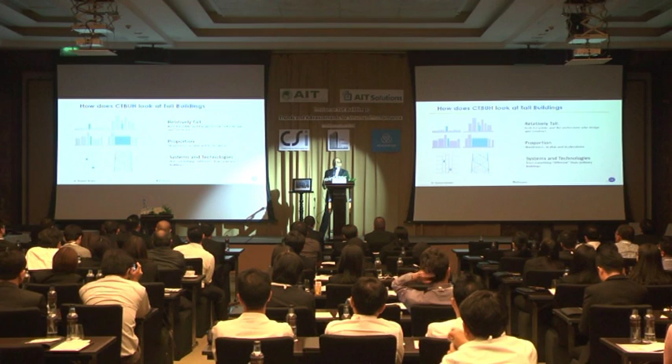Similarly, proportions: it's not only tall, it must also be a little bit slender so that we have issues with that. And then it should use technologies that are typically not used for other buildings. So that's how we will define a tall building.

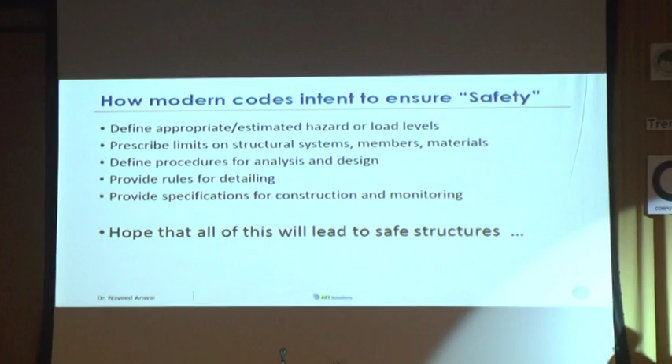How modern codes look at safety: I mentioned earlier in the morning that they just hope for the best. They give you rules and they hope that all of this will lead to a safe building and people's lives will be safe, and that's just about it. And it doesn't seem to prevent other things that we have seen in several presentations, including the many damages that Professor Pennung has shown. Modern codes, as I mentioned, have rules, sometimes very arbitrary rules, and they apply them uniformly, and that's the key. The code rules are intended to apply uniformly everywhere, irrespective of whether we need them or not.

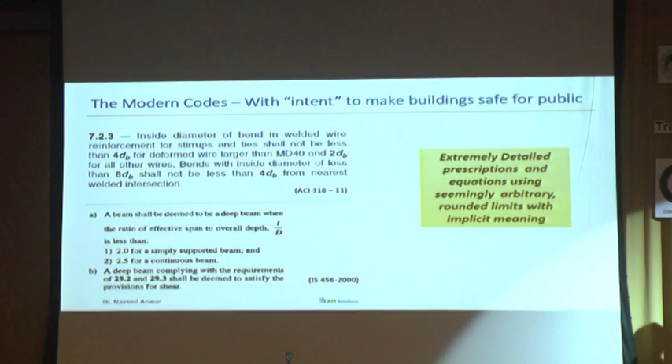For example, in a tall building, if there are 50 floors and the code requires that you provide hinge detailing at the bottom and top of all columns on all 50 floors, it's unrealistic, because not all columns are going to develop hinges in an extreme earthquake. Few of them will go into nonlinear mode, and most of them will remain elastic. Why do we need the hinge reinforcement in those locations when we know that they're never going to go inelastic? If we can prove it, then we will not need that confinement or that heavy reinforcement there.

Similarly, shear walls. The code says that you have to provide confinement over the height, or do simple checks. How can we explicitly check that the strains are small enough that we don't need the confinement? So with the rules that we specify in the code, first of all, we do not know what happens if you don't follow them. For example, the spacing of the hoops: it says 4 inches, 100 millimeters, in a column. But these were developed from research on small column tests, say 300 by 300 or 400 by 400 millimeter columns, where that spacing is very important. But in tall buildings, the columns are a meter or a meter and a half.

Over there, 4 inch and 8 inch spacing make no difference in the confinement that you're going to get, because the column is quite large. Confinement pressures will not be affected by the spacing in that range. But because the tests are not done for such sizable columns, we do not have clear recommendations, so we just follow them blindly. We don't know if changing the spacing from 4 inches to 6 inches will really reduce the confinement, or make any difference to the building. These questions are not answered. We just follow the rules because we do not know their impact explicitly.

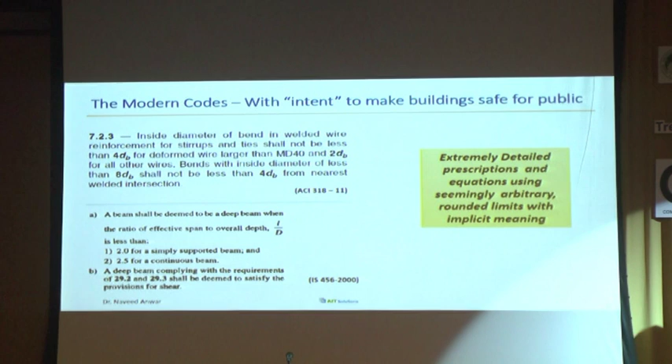But in performance-based design, if you start using fiber models and so on, you can actually vary the spacing for a particular column. You can check whether it's going to affect the moment-curvature curve or the hinge properties, and then see if it's worthwhile or not. So these kinds of things we can actually do in more detail. So these rules do not make much sense at that point.

So I'm going to skip. We already saw the family of codes. We talked about the building code. Now let's talk about this one. The owner or the public is of course concerned with safety. The owner is concerned with many questions. Will the building collapse? Will it be damaged? Can I use the building after the earthquake? How long to repair the damage, and so on? Many questions that we ask, and Pennung already mentioned many of them. From various studies, fragility and so on, we can answer some of them.

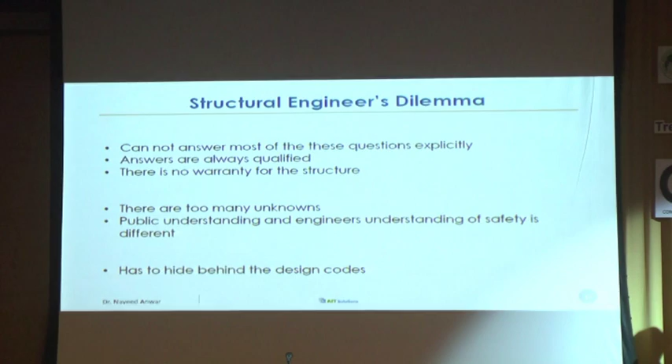Structural engineers, on the other hand, without the advanced knowledge, do not have the answers to many of them, because they simply follow the code without understanding what the impact might be, because there's no explicit way to check otherwise. So, as I mentioned, the engineers hide behind the codes.

And we also talked about the shortcomings of the codes, especially for tall buildings. I was just looking at a presentation from Jack Moehle, I think, and he mentioned that in the US, only 1% of buildings are considered tall. 99% of buildings are not tall. So the codes are developed for 97 or 98% of buildings. They don't really care about buildings in the less than 1% range, which we are talking about. So actually, the codes never intended to cover those buildings in the first place.

So these are the motivations for performance-based design, that we can get explicit answers, we can do things more clearly, we can go beyond.

Really? How many minutes? I just asked you. Okay, all right. Skip. Performance-based design. So let me just mention a couple of things. I really have to go fast. No, go back. Yeah. Well, luckily I have 7 presentations. So if I don't finish this one, I'll continue with my next presentation.

So one very important thing that is coming up now is that performance-based design has always been thought of as something that you only do for earthquakes. But people are realizing that the concept is pretty good. We can apply it for other loadings also. Especially now, wind. Performance-based design for wind is something that people are looking at. At AIT, we are doing research to see if the same concepts can be used for extreme wind. Even for live load, just think about it.

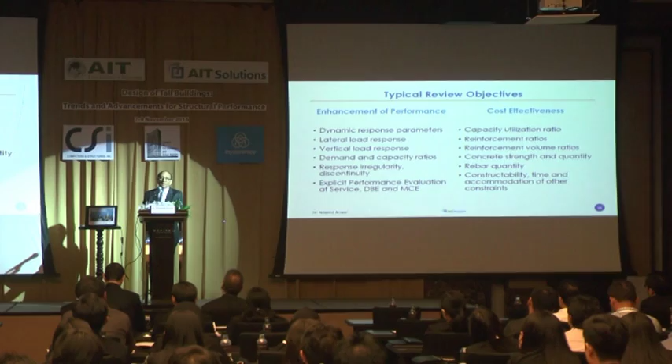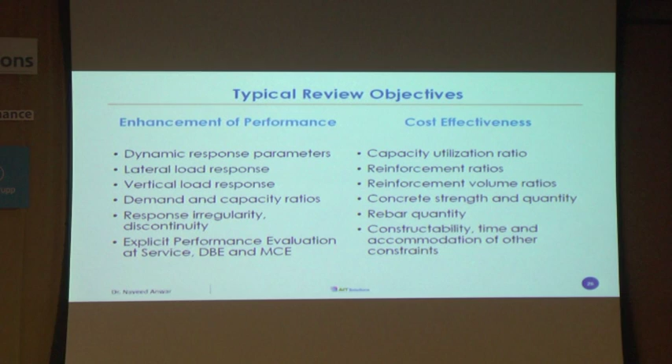Similarly, we design the beams or a column for a certain section, and we optimize, and then the rest of the column is actually underutilized. So most part of the structure is underutilized in terms of capacity, and few locations control that. So if you can check that, then the cost effectiveness can be checked. Reinforcement volume ratios is a typical indicator. Concrete strength and quantity, rebar quantity, constructability, time, and so on. So we can look at all of these aspects while we're doing the performance evaluation to make sure that whatever decisions we're making on the performance side are also good on the value or cost effectiveness side.

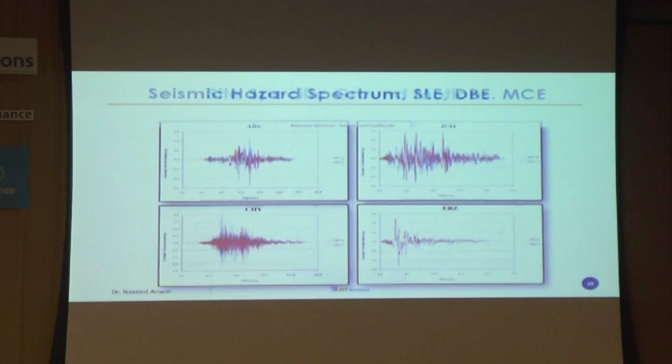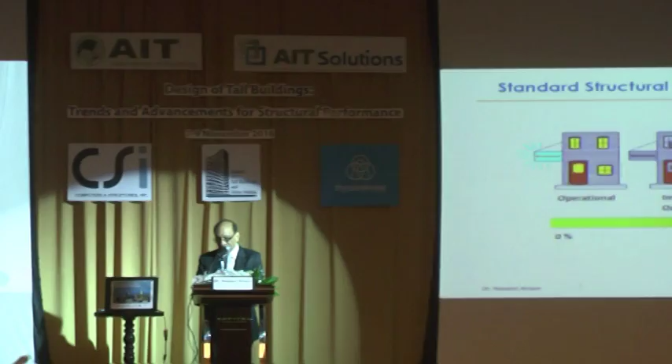Performance objectives we have seen in the morning, so I can skip that slide. Ground motion, we have talked a lot about that. Response spectrum, we have talked a lot about that. We have also seen the typical acceptance performance criteria from operational to collapse prevention and anything in between. So basically, depending upon the use of the building, the type of hazard, the type of consequences, we can define where the building is going to be for various hazard levels. The performance can be checked at many levels. It can be checked at global level. It can be checked at local level.

Because ultimately engineers need some numbers. You know, we all like numbers. So we want to know, okay, what does immediate occupancy performance mean for me? It means for you that your rotation in this beam should not be more than this one. Then the engineer is happy, because now he or she has a number to check. And if you say your ductility ratio must be like this at the column location, or a wall, or a strain limit in the rebar in the shear wall should be like this, they can check it and move on, and then we can accumulate that information into performance objective compliance.

So we have similar requirements for structural, non-structural, and different actions, which are ductility controlled, brittle elements, different limits. All of this work has been done by a huge body of researchers, and those recommendations have come up. But again, these are recommendations, and we have found, because we work a lot with peer reviewers in the US and with our colleagues in the Philippines and other countries, that these are subject to discussion. These are not rules like the codes, because these are not codes, these are guidelines. So you can always challenge them, look at them, do testing to say, no, this doesn't make sense. Or you can discuss with the peer reviewer and change the limits. It happens many times that you can actually change these limits for particular projects. So that's the whole objective.